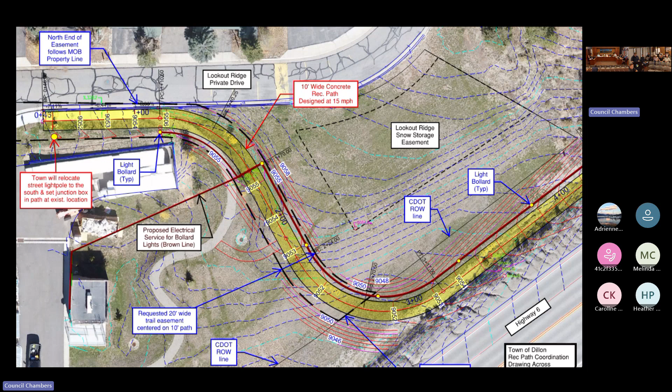But anyway, the temporary construction easement takes into account work on this land, cutting in here. The little red lines are contours showing that we have to build outside the path footprint quite a bit in order to physically build this little embankment to put the path through there. We also need to tie the electrical for the bollard lights back into this building here. So that's what that's all about. That drawing kind of looks like that - that's what the temporary construction easement looks like on their property. So it's pretty simple, I kind of worked through that.

Nick had done that before he left a couple months ago, and we've been working on this for months, if not years. But this is the final configuration of what we agreed to. You can see the snow storage easement in there, where our limits of work go right up to the snow storage easement, just to give us enough room to work and get everything done.

So there isn't too much more to say about that. The next easement is the permanent easement for the sidewalk, the next resolution. Staff recommends approving resolution 34-24. Any questions for Dan?

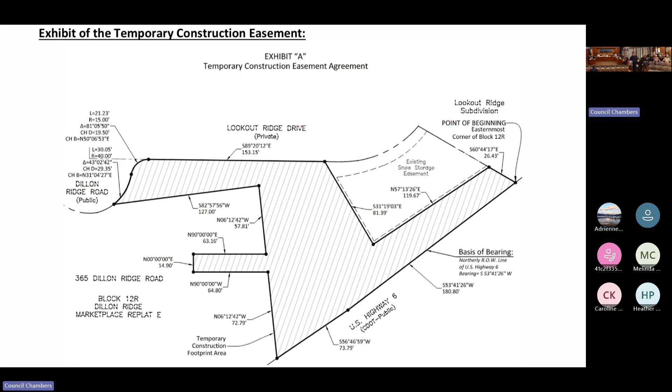I would entertain a motion to approve resolution number 34-24, series of 2024. Any further discussion? Roll call. Councilmember Tyne, yes. Woods, yes. Luck, Moore, yes. Christensen, yes.

Hendricks, yes. Rivera, yes. Item 6, consideration of resolution number 35-24, series of 2024, a resolution approving a permanent easement and maintenance agreement between the Town of Dillon and Dillon Medical Properties LLC.

Dan? Same thing, this is the permanent easement. So we're building a 10-foot sidewalk now. Originally we were thinking about 6 foot, and they let us expand our easement to be 20 feet. So that gives us 5 feet on each edge of the sidewalk for snow storage.

And also the bollard lights will set back about 2.5 feet from the edge of the sidewalk. But it's pretty simple, that's what we need to do to own and operate the sidewalk through their property. And we're on the hook to repair it forever. We also have to provide an insurance certificate every year.

Is it going to be concrete or asphalt? Last fall the direction was concrete, so that's what we're doing. There's no budget impact for the actual easement. Town staff recommends approval of resolution 35-24.

I would entertain a motion. Any questions for Dan? Yeah, is there any chance of the light fixtures not shining towards Lookout Ridge? Well, some of them will shine to the path. We could certainly move them to the other side.

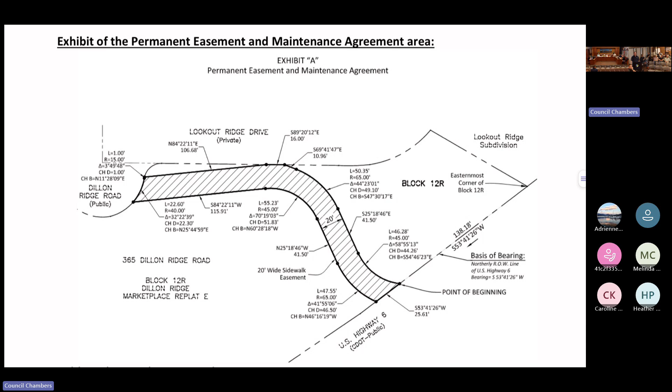I don't have a slide for that one. This development agreement change is just to memorialize some of the changes that were made during construction. They built this and finished it, I think in 2020, right around the pandemic. I remember we had to wear a mask when we were going for our final inspections.

One of the main things their attorney had redlined throughout, and Nick had prepared this document probably a year and a half ago. It's gone through a bunch of changes with their legal staff. Because of the pandemic, the project manager kind of dropped the ball on that, and we didn't get back into it for a year. But it wasn't urgent. We kind of worked through it again with a new attorney and their new project manager.

The main thing going on is that there's a lot of things their attorney wanted to identify as completed in this particular document.

The main changes to the original development agreement you guys approved was there was originally a requirement to put another crosswalk at the intersection of Dillon Dam Road and Highway 6. And CDOT said no, unless we proved we had to have it. So we just got rid of that.

We had a discussion about that like 5 years ago with the town council. That eliminated the leg that went along the southern end of North Dillon Dam Road and on the east side of that intersection. So that's why they're not there. This document removes that from the development agreement, so it's not an obligation for them anymore.

The big thing for us regarding the path is that originally, to get these bollard lights, they were going to put in a separate meter for us. Then we would own the bollard lights plus the street lights along Dillon Ridge Road along the north side of the property. They didn't do that during construction. I think it was just too cumbersome and not what Xcel wanted either.

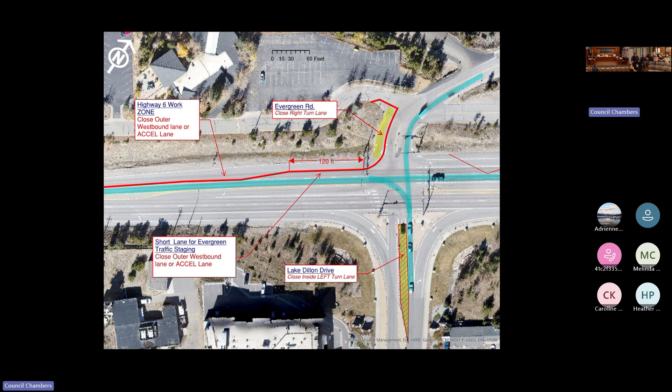Up next, item 9, consideration of resolution number 3824, series of 2024, a resolution approving a contract with Columbine Hills Construction LLC for the 2024 Highway 6 sidewalk project.

Back in October, we revisited this and rescoped it quite a bit. We changed it from a 6-foot to a 10-foot sidewalk, and we also wanted to make sure it was bike path compatible.

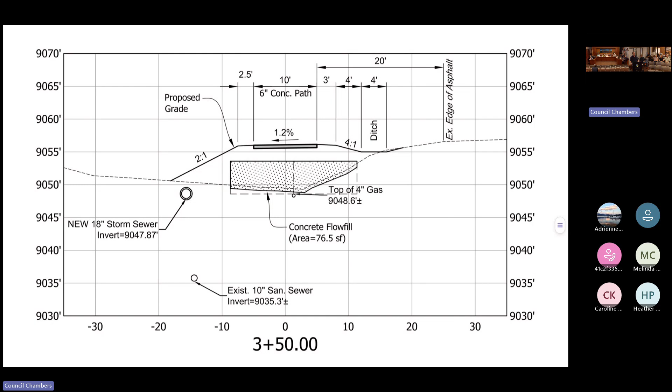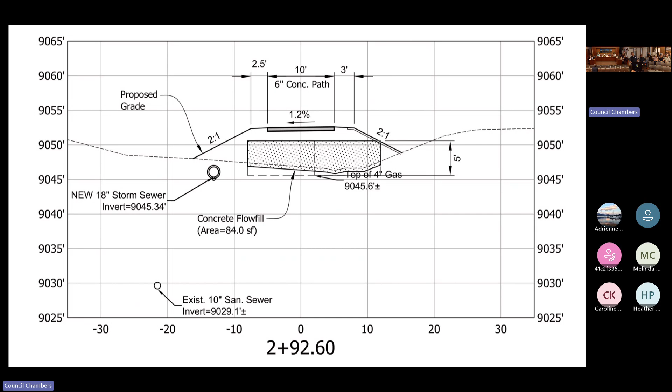Anyway, let's see, so this is back to the path design. This is another section where the embankment is, and that gas line kind of moves around as we go around the corner. This drawing shows an overview of once we leave that little valley and get up into the area where we needed the wall. This is where we needed the wall.

Another reason for putting it 7 feet behind the sidewalk was to make sure there's enough fall room from a bicycle design standpoint, so if someone falls off their bike they don't hit the wall. That pushed the wall farther back into the hillside too.

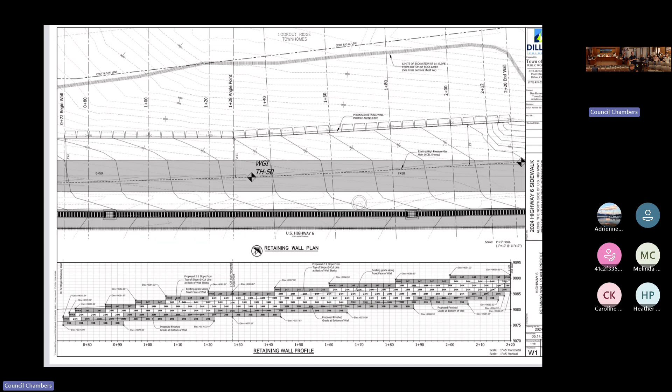We decided early on, because of the logistics of this, to work with Columbine Hills on developing a project cost for us. I didn't honestly know how to build this because it's this long skinny thing on the highway, and they have a lot of highway experience and gas experience. They brought to our attention this problem with the high pressure gas main. So it's been a good partnership. They also went out and found a new block system that was much cheaper than the one I had originally proposed. It's really been helpful to have them on board throughout the final design of this project.

What we have to do to build this wall -- you can see we have 7 feet from the back of the walk over to the wall. In this area there's only about 4 or 5 feet between this new curb and gutter drainage section, which is about a 5.5 foot wide pan. That's to replace the ditch we're removing, to make sure CDOT has good drainage during the winter. Then we only have between 5 and 13 feet, depending on where I meandered the path and pushed it into the hillside. Then we have the 10-foot path, then the 7 feet here.

The other reason for the 7 feet was that when we dig this hole to put the bottom of the retaining wall in, we always have to stay 10 feet off the gas line with our equipment this way. That gives us 3 feet in front of the wall to do vibratory compaction, to really get the compaction in front of the wall, which is what you want so it doesn't slide. Then we put this in here, and we do a 1-to-1 cut slope, which ends up within about 2 to 3 feet of the right-of-way line. Then we come back at a 2-to-1, and that sets the wall height. 2-to-1 is kind of our standard for safe design in the mountains -- most everything in town is at a 2-to-1 slope.

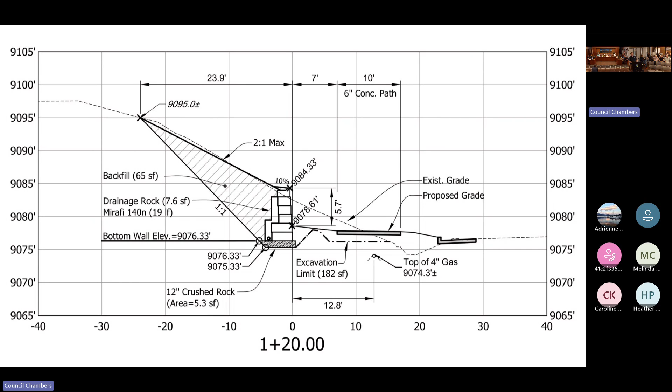I can show you -- this is my typical section. Usually we would recompact this and put bedding material, but here we're just putting bedding material on the bottom, and this is all flow fill.

Okay, something wrong with my connection.

But this is all flow fill too. So that was another cost, and I broke that out and put it all under the flow fill cost. That was $112,000 for this flow fill.

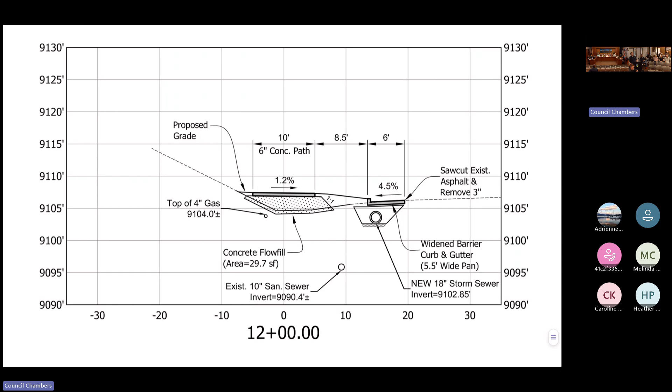And then you can see on top of the gas line, here's the gas line again. We're just going to flow fill a bench in there to create this bench for the path, so we don't have to do compaction. On some level that'll help speed things up, because instead of having to import material, bring in 200 trucks of material, spread it out and stockpile it somewhere, the concrete flow fill will speed up construction. We just dig a hole, support the edges, fill it up, and the next day come in and form up the sidewalk. So that worked out pretty good.

Again, here's the path, and this is another cross section, same thing we're talking about. You can see the pinch point between the sidewalk and the back occurs about 5 feet. That puts the edge of the bike path or sidewalk about 12 feet from the edge of the travel lane on the highway. That's really the best I could do, but I think it'll feel okay to most people, since right now they're on the highway. It's going to be a nice improvement. If you don't like it, you can get on the other side of the path and be 22 feet away.

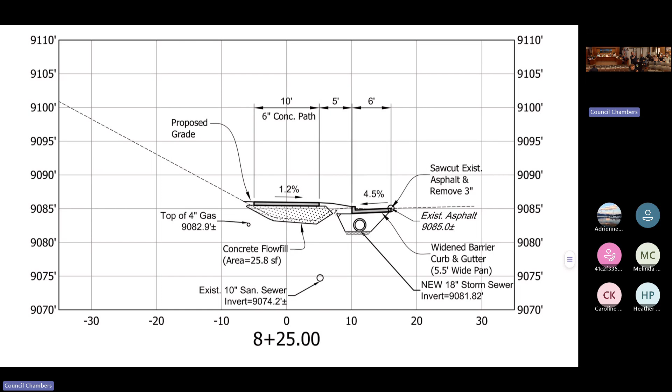So this is the storm sewer design. Starting at the bottom in that little valley, we come up and step up. We have to cross the gas line once, then get over underneath that new 5.5 foot curb and gutter section we're building along the highway all the way up to Evergreen. We put an inlet every 100 feet, which you wouldn't design for rainfall, but because of the winter snow storage use historically, we wanted enough drainage so we don't end up with icing issues.

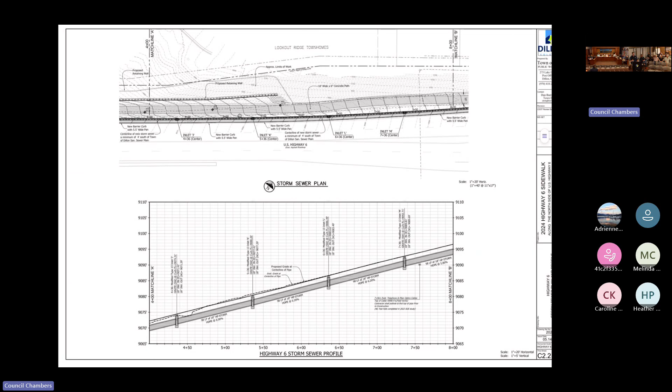So far they're pretty happy with that. That's a ditch, it can handle an unlimited amount of snow and stuff. We'll have the 5 feet plus the 6 foot barrier, so about 11 feet in the minimum section for snow storage. When we widen the path out that extra 7 or 8 feet, we'll have about 15. I think it was a pretty good compromise, we were able to get the path in and also accommodate CDOT snow storage. This is the path as we get up to the intersection.

This drawing just shows you there are so many little utilities we had to go around, so we had to step the pipe up.

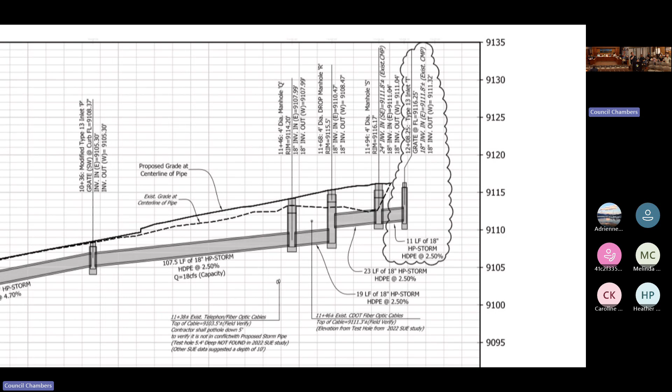One of the expenses in this project is the pedestrian buttons. We have to put those little poles with pedestrian buttons on them, like you see at most of the intersections when they redid it about 5 or 6 years ago. So we'll put one in each direction over here right by the sidewalk.

So someone in a wheelchair can get to it. And then the next thing, this is just a blow up of that.

One of the biggest problems with the design was there's the gas lines here, and then we have the signal pole. We try to center the pipe between the two, so that we don't undermine the signal pole, so it doesn't tip over and we don't get into the gas main. So at the end of the day, setting this new inlet out here and separating these two pipes by cutting them back worked out pretty good.

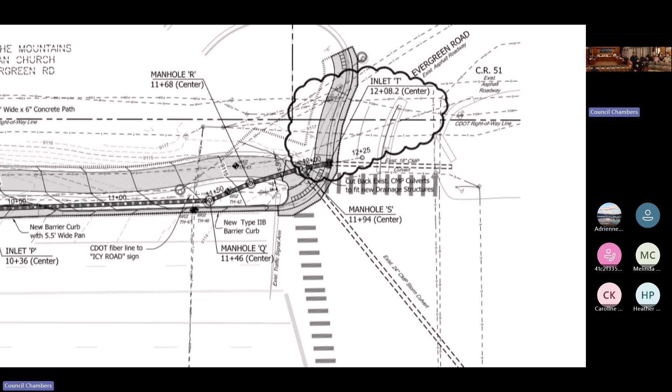I feel like we haven't had a good sidewalk project in a couple years, so this is an exciting thing to add to the community. And I think we'll address a lot of the concerns we hear about people walking up to the Evergreen and Lake Dillon Drive intersection and not being able to get safely around town. It doesn't help them get over to this side of the street any better, but we're working on that too. So I'm excited to see this happen. I think the community will be very excited. And Ryan, I think you should be typing away furiously right now about this exciting new sidewalk going in that's going to add to the walkability in Dillon, in and around Dillon into neighboring communities.

Yeah, the intersection improvements around the signal pole will get sacrificed, but for the most part, most of it's going to stay the same. I think when you put the roundabout in, we narrow the road where it comes out of the right of way, going down the hill. At some point it widens back up in the configuration of Dillon Dam Road. But pretty much our sidewalk, the drainage, and the distance from the travel lane will probably get a lot wider, by like 10 or 15 feet, once they put the roundabout in.

Chipping away. Any other questions or comments for Dan? Thanks for all your work on this. Yeah, we got it. Thanks for all those meandering turns. I can't wait to walk on it.

It's gonna be nice. I would entertain a motion to approve resolution number 3824, series of 2024. Move. Second. Any further discussion? Roll call. Councilmember Tyne, Yes. Hendricks, Yes. Woods, Yes. Christensen, Yes. Memora, Yes. Luck, Yes. Maskowara, Yes.